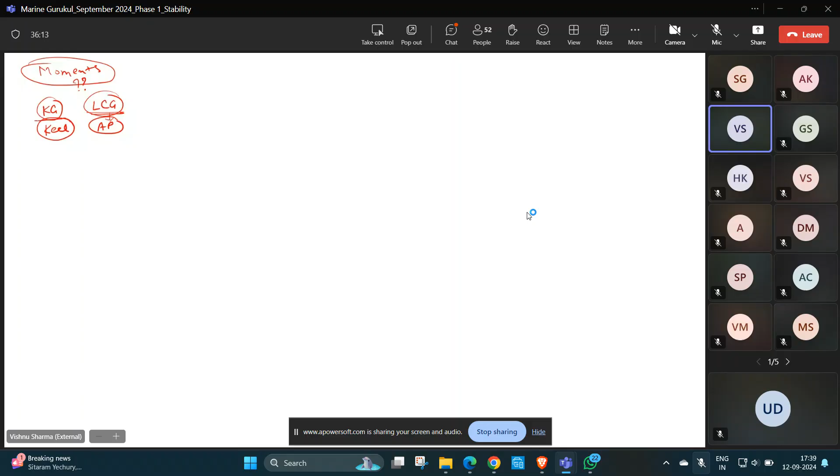So, what is important? Let us say we have a ship here. Let us say the ship comprises of only 3 weights: W1, W2, and W3. And let us say the weight of the ship's hull is negligible. That means the displacement of the ship is now nothing but W1 plus W2 plus W3.

Now, if you are talking of KG, then you are talking about the distance of the center of gravity of W1 from keel. This is called the lever of weight 1, and we can call it KG1. So what is KG1? KG1 is the lever of W1 from the keel. KG2 is the lever of weight W2 from keel. KG3 is the lever of weight 3 about keel.

Then we say, what is the vertical moment of W1? It is W1 into KG1. That means the weight multiplied by its lever. What is the vertical moment of the second weight? It is W2 into KG2. What is the vertical moment of the third weight? W3 into KG3. Is there any other weight on the ship, including the hull? None in our assumption. If we add all of them, we get the total vertical moment of the vessel about keel.

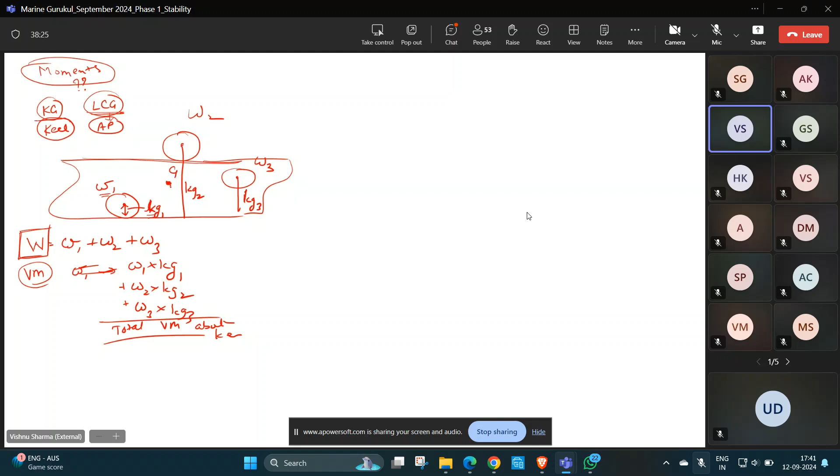And what do you do? You assume the ship as one entity and say the total weight of the ship is one body. It is distributed at W1, W2, W3, but until now I was taking each one of them as individual. Now they are all placed in one body. And now we are saying, where is the center of gravity of the body? The center of gravity of the body is G. This is the lever of the COG of the ship about keel.

So the vertical moment of the ship can be obtained by adding these three, or the vertical moment can also be obtained by multiplying W into KG. Since both these represent the vertical moment, we can equate them. And that is how you calculate KG by this formula, guys.

This is how you have been calculating KG. Some of you may have realized what you are doing, some might have just mugged it up, dividing by W1 plus W2 plus W3. I'm sure all of you are familiar with this method. Yes or no? Yes, sir.

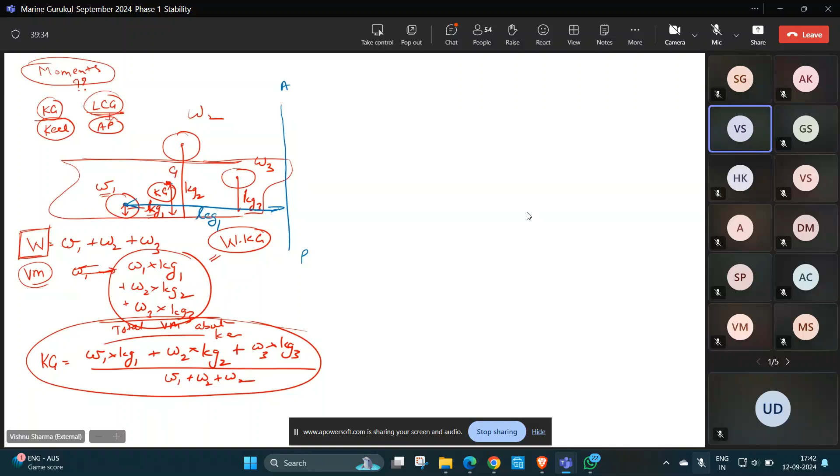Now, in the same ship, if I take the levers not about keel, but about the after perpendicular, then this becomes the lever of weight 1, LCG1. This is the lever for the second weight, LCG2. This is the lever of weight 3, LCG3.

Tell me, guys, will W1 into LCG1 plus W2 into LCG2 plus W3 into LCG3, which is the vessel's longitudinal moment, be equal to the vertical moment, or do you expect them to be unequal? Unequal, sir.

But you see, it's the same ship, same weights, in the same location. You've not shifted anything, yet the longitudinal moment value does not match the vertical moment value. Why? Because the axis about which the moments have been taken has changed.

Axis has changed. So guys, when you take moments, what is important is you have to identify moment of what. Exactly the same way, we can take the moment of area, the moment of volume, the moment of mass, the moment of weight, or moment of any physical quantity. Mass and weight we have just seen for KG and LCG. Similarly, area moments and volume moments can also be taken.

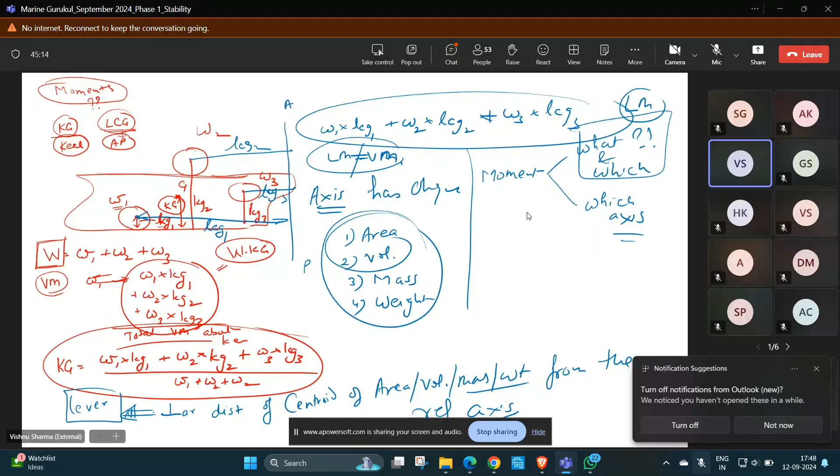And you see, when the ship comprised of three weights, we could add all the moments and get the total moment of the ship about keel or about after perpendicular. Any questions on the class? Is it clear?

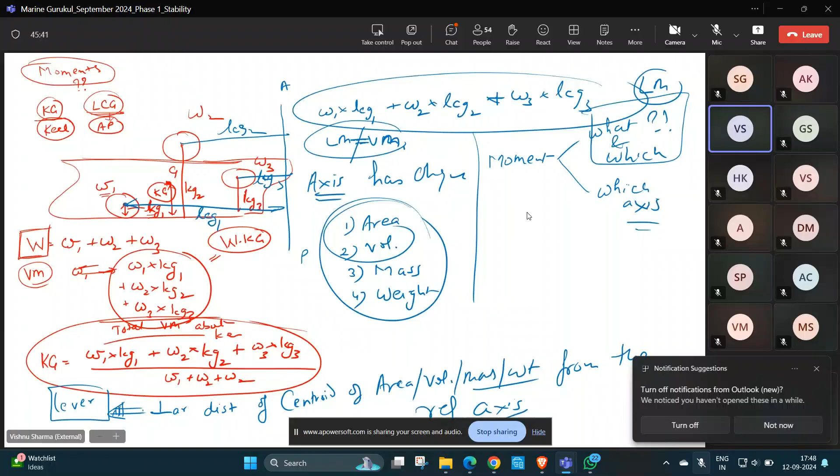Now, guys, on the same lines as the ship's KG, suppose I have an axis, let's say y or x or z, doesn't matter. Let us say I have two areas: area A1, whose geometric center is G1, and area A2, whose geometric center is G2.

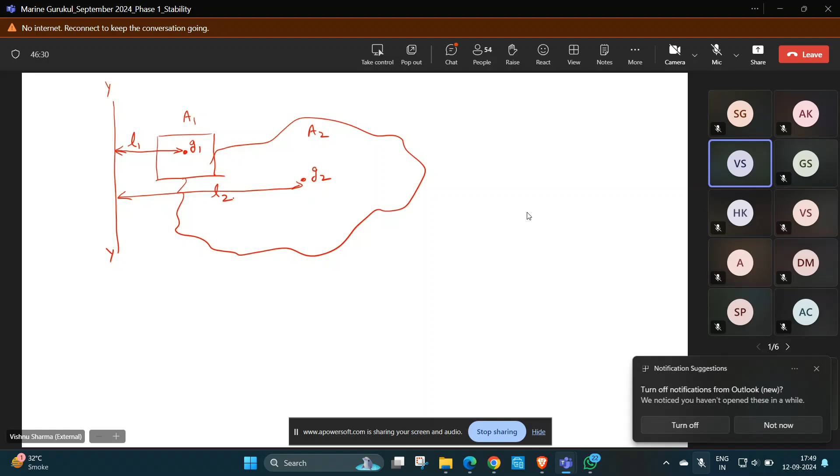Now, if reference axis is YY, then this is the lever of area 1 from YY, and this is the lever of area 2 from YY. So this represents moment of area 1 about which axis? About YY, it will be equal to A1 into L1. Does everybody agree? Yes, sir.

Clear? Exactly the same way, moment of area 2 about YY will be A2 into L2. Now if I talk of the combined area, I'll run the blue marker on the total combined area. The total area A, if blue area is A, we know A is equal to A1 plus A2.

Now what will be the moment? If I add these, I'll get moment of area 1 plus moment of area 2, and this will be A1 into L1 plus A2 into L2. Since there are only two areas, this will become the total moment of A1 plus A2 about YY.

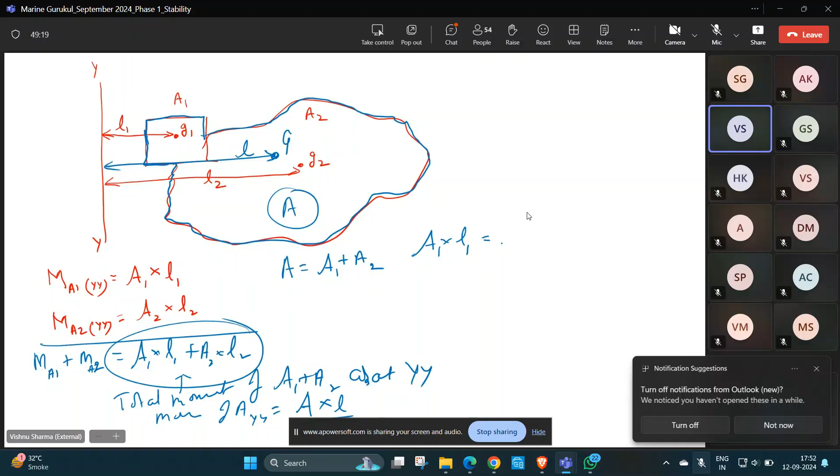Since these both represent the same moment—in one it is the total area's moment, in the other it is the sum of the moments of the components—both have to be same. So A1 into L1 plus A2 into L2 has to be equal to A into L. That means the distance of G from the axis will be equal to A1 into L1 plus A2 into L2 upon total area, which is A1 plus A2.

This is exactly what you do for KG. Remember, guys, when you find the KG of the ship, this is how you find it—instead of area, it's the weight which comes into picture. Am I right? Correct? Yes, sir. So it is the same concept.

Why am I repeatedly talking of KG and LCG? Because you've been using it day in and day out. You may know it, you may not know it, but you are using it.

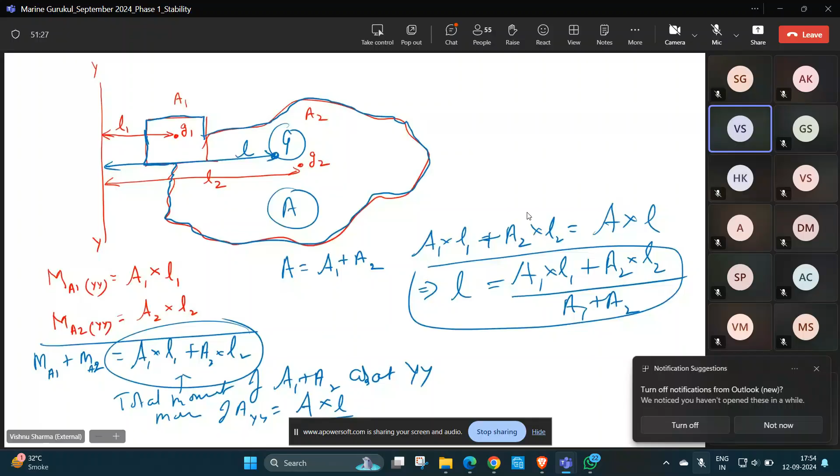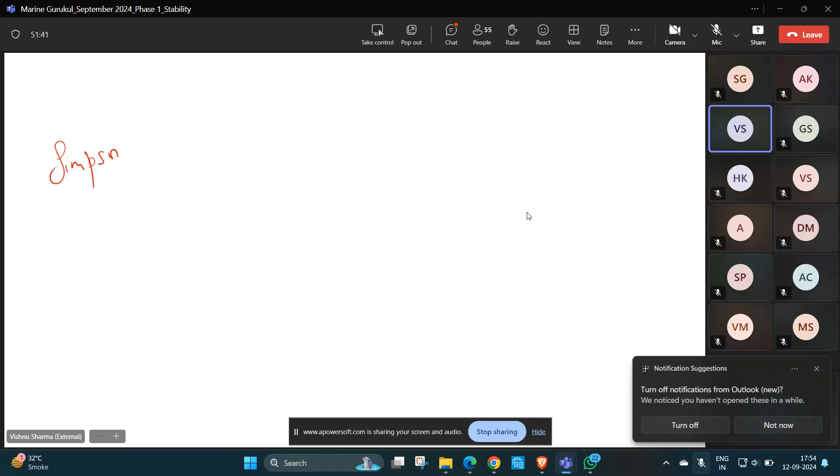Now, the last thing before we go further: what are Simpson's rules? They will come in later also. Simpson's rules is nothing but a simplified technique of integration.

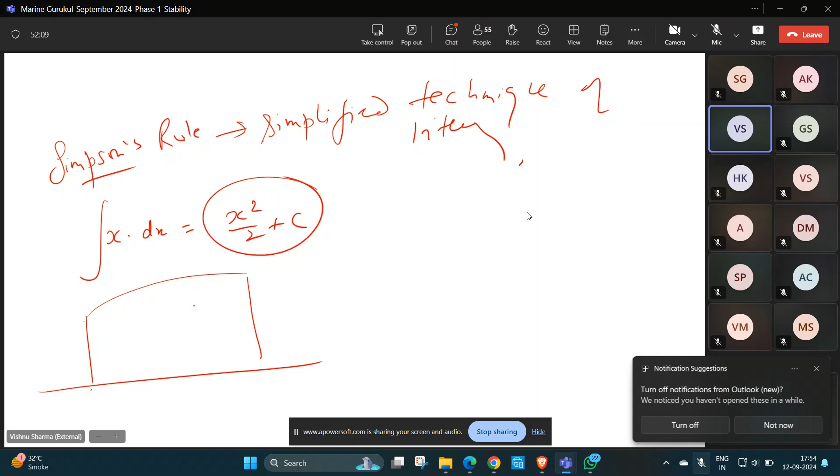Guys, in school we learned what integration of x dx means—it means x square by 2 plus constant. So for curves, if we have an area like this, we'd take an elemental strip of thickness dx, find the equation of the curve, calculate this area as rectangular, and then integrate within the limits using definite integrals. That becomes a cumbersome, tedious process.

So what did Simpson do? He simplified this technique of integration through the application of his technique. So if somebody asks you what Simpson's rules are, it's nothing but a technique of integrating. And what is integration? Integration is adding together, putting everything together. You integrate the states of India, it becomes a country. So integration is nothing but adding, putting them together. That is what integration is—it's a simplified technique of integration.

Now, are these empirical rules or derived formulae? What are empirical formulae? Empirical formulae do not have a derivation. People perform experiments, get results, and then try to make a formula in which the results can fit and be justified. They don't have a derivation backing them.

What are mathematical formulae? Mathematically derived formulae are the formulae which have a derivation backing them. Simpson's rules are mathematically derived formulae. They are derived formulae, and therefore they have a derivation.

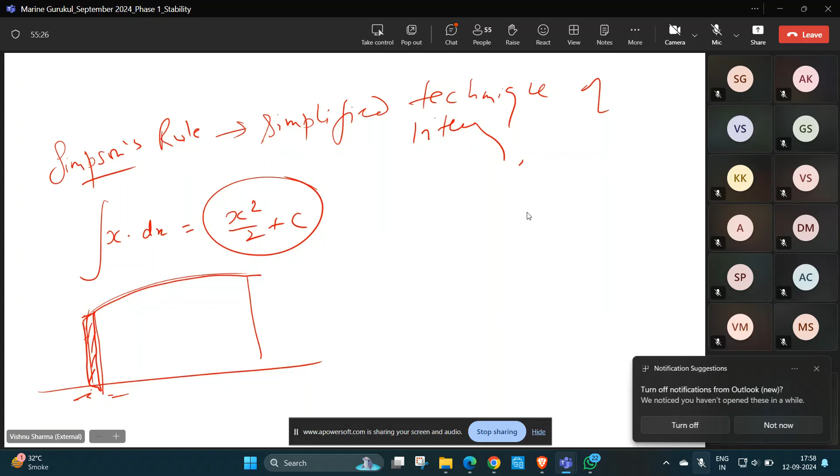Simpson's rules are a convenient and user-friendly technique of achieving integration. Results are not exact, but reasonably good for the purpose of naval architecture. So hence it is extensively used in naval architecture.

These rules are mathematically derived. We don't have the derivation as part of our curriculum, but the derivation is quite simple. At any stage of your career, if you want to educate yourself, all of you have access to Ship Stability by Derrett. If you open the chapter on Simpson's rules in Derrett, you'll find the derivation. So if at any stage you want to go through the derivation, I've told you where it can be seen.

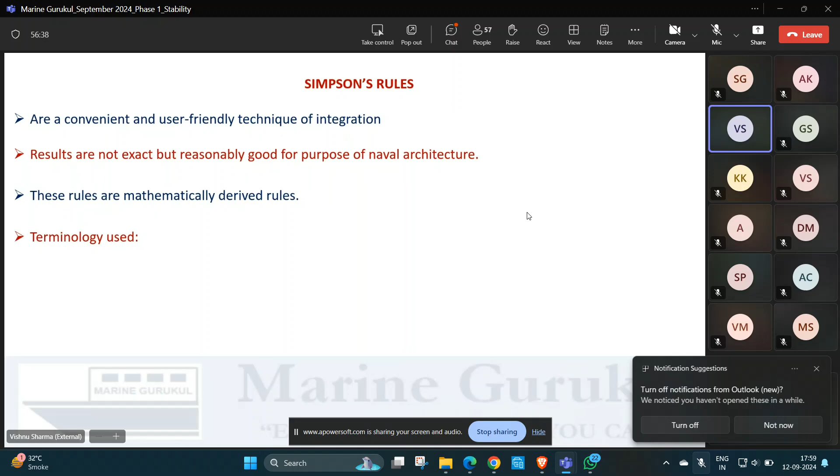Now, it is very important that we understand certain terms when we apply Simpson's rules, because we'll be repeatedly using those technical terms. The terminology has to be clearly understood. What is it that we need to know?

First will be ordinate. Second will be common interval, represented by small h. Third would be Simpson's multipliers. Fourth would be Simpson's coefficient. And last would be the result. We shall first understand these correctly.

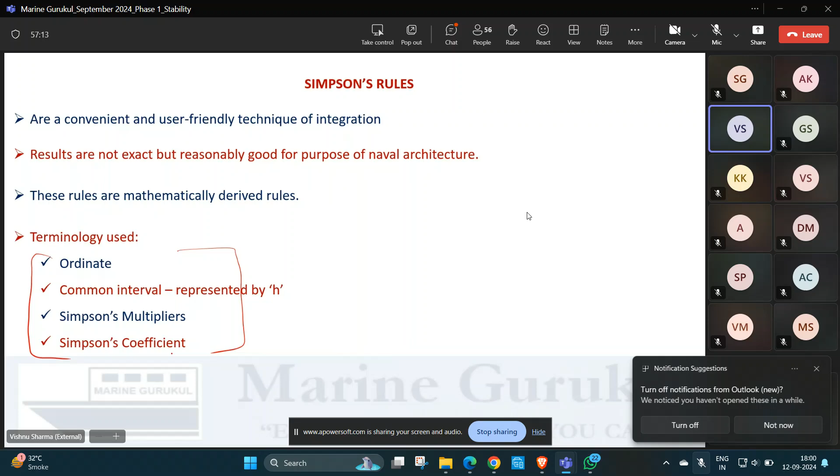What do they mean exactly? Now, what is ordinate? Ordinate is the input to the Simpson's process. If you manufacture something, there is an input and there is output. So to the Simpson's rules, what is it that you use as input, and what is the output you get?

Guys, just have your fingers in front of you, all four fingers of your hand. Just spread the four fingers apart. Now what happens? Each finger is separate. Assume that the thickness of each finger is negligible, so each finger represents a straight line. Have you done that?

Each finger represents a straight line, and you have opened them up, with each having negligible thickness, so it's just a straight line. Now, if you put all the fingers together, you have integrated them, put them together. What does it become? It becomes an area, yes or no? If you bring your fingers together, all four fingers form an area. Am I right, guys? Yes or no?

Yes, sir, correct. Suppose you take matchsticks, and imagine each matchstick has negligible thickness, so each matchstick represents a line. When you lay all these matchsticks on the table, each joined and connected to the other, each touching the next, you'll find these matchsticks occupy a certain area of the table. Am I right? They will occupy an area of the table like this: one stick, second stick, third stick, fourth stick, fifth stick, and they will be occupying a certain area.

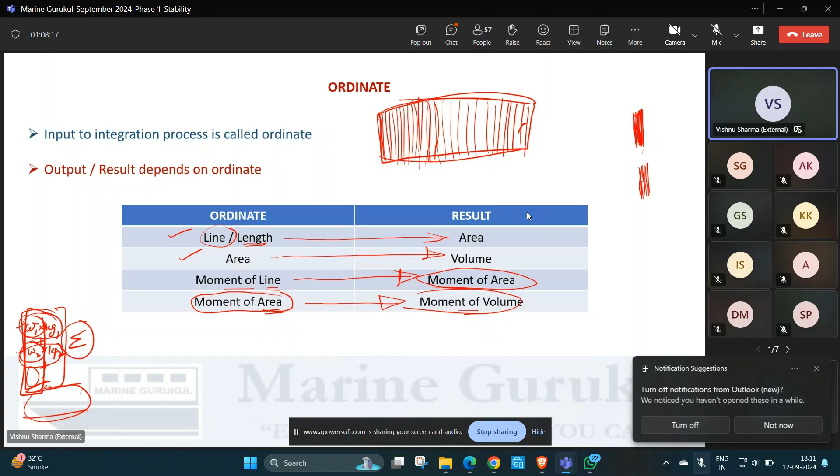So please remember, my ordinates can be the length of a line. If it's length of the line, the output would be area. My ordinate can be area, in that case the output will be volume. My ordinate can be moment of a line, then it will be moment of the area formed by those lines. And it can be moment of area, then it will be moment of the volume formed by those areas. Have you understood? Any of these could be the ordinates, and depending on what is the input to the process, the output will accordingly change.

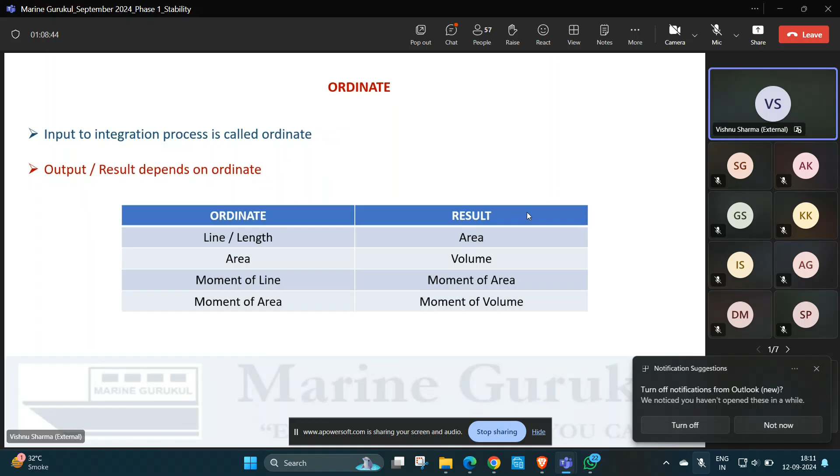Let me clear it and show it to you again. If you have any questions to ask, tell me, beta. Is that clear? Clear, class? Yes, sir. I'll continue explaining on this page only, and I'll not show the next one earlier.

So we had a couple of terms. First was the ordinate, we have already understood what an ordinate means. Second was Simpson's multiplier. Of a forecastle like this, you need it for whatever purpose. As a chief officer, what can you decide? Okay, I will measure the breadth of the ship, this forecastle, at a few select points, and then I will put it through the integration process through Simpson's rule, and I will get the area of the forecastle.

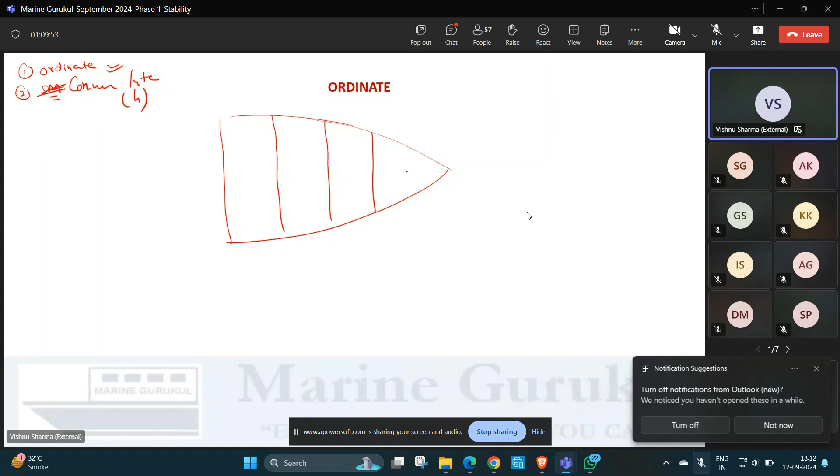Now, sorry, not Simpson's multiplier, sorry, this is common interval. The common interval is first that I'll cover, represented by small h. In Simpson's rules, it's important that when I decide to take certain ordinates, measure it at a few stations, these are the ordinates I have picked up, which I'll put through the Simpson's process to get the area. Now, what is important in Simpson's rule is that these ordinates must be equispaced.

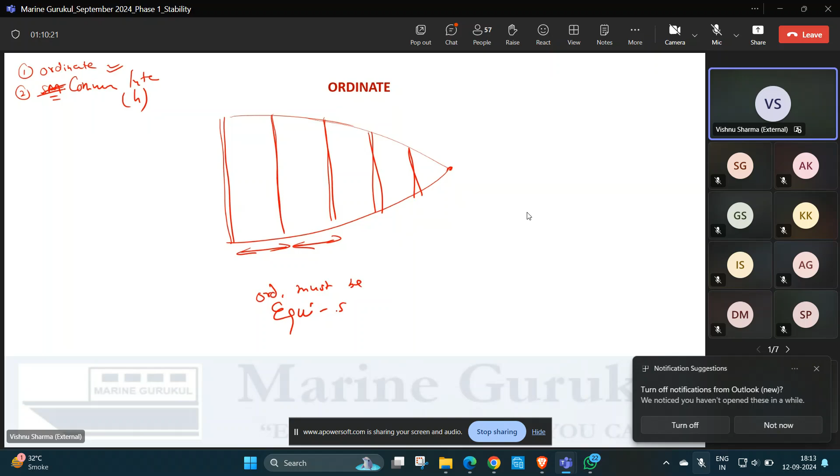So it's called common interval, represented by small h. Have you understood the meaning of common interval, guys? Yes or no? Yes, sir.

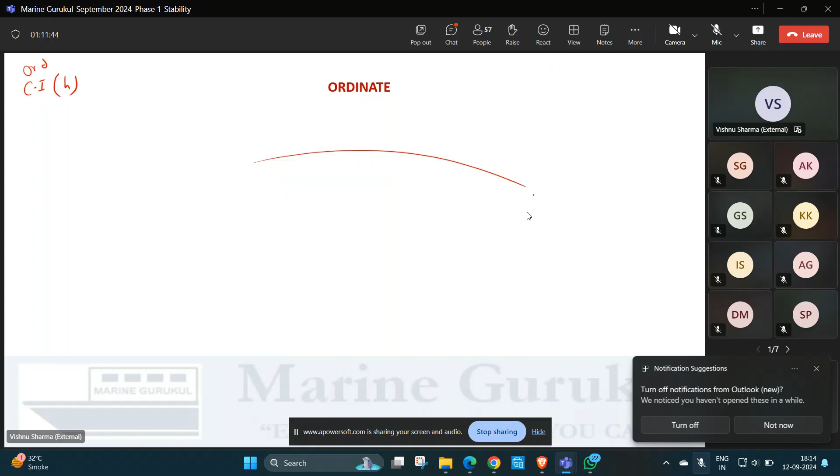So now, for example, we have done the ordinate. Now we are talking of common interval h. In this, let us say the length of the forecastle is 30 meters, and the chief officer feels he'll take only three ordinates. So one he'll take here, one he'll measure there, and the third one he'll measure midway. Why? Because the spacing has to be the same. So in this case, there are two common intervals, 1 and 2. So the value of the common interval will be 30 by 2, equal to 15 meters. Am I right, beta?

Correct? Right, guys? Understood, beta? What is common interval?

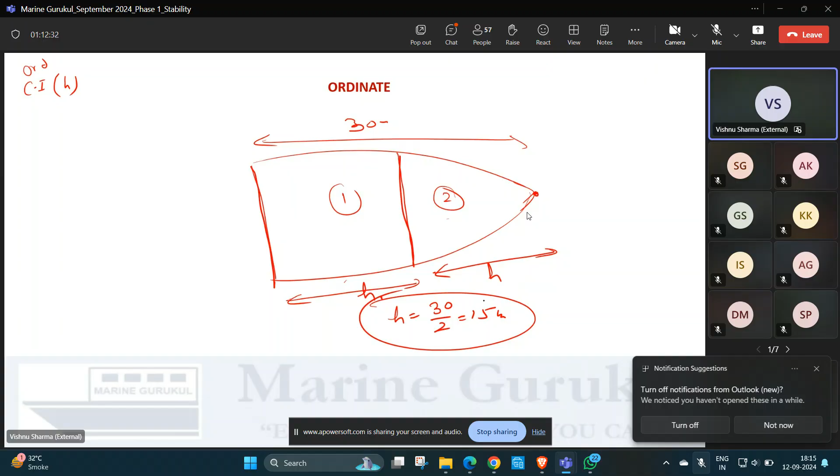Now another chief officer may feel, no, no, I'll not take 3, I want to take 5. Now how many intervals are there? 1, 2, 3, and 4. So in the blue one, the value of h will be 30 by 4, that is 7.5 meters. Have you understood? So more the number of ordinates for the same situation, lesser will be the common interval. Lesser the ordinates, more will be the common interval.

And now in Simpson's rules, we said it gives you a good approximation. So if you want to improve the accuracy, you should reduce the common interval to as low as possible. Lesser the common interval, more accurate will be the results. Higher the common interval, lesser accurate would be the result.

So same for forecastle: one chief officer does with 3 ordinates in the red one, another does with 5 ordinates in the blue one. Obviously, the result of the one who does with 5 ordinates will be better than the one who does with 3 ordinates. Is that clear, beta? So don't say why should I take 5. If you want to improve the accuracy, you will have to take more ordinates. Is that clear, beta?

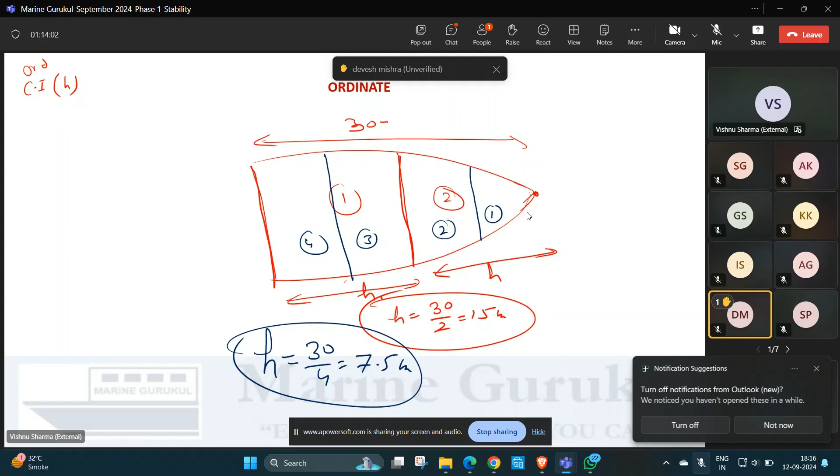So we have learned two terms. One is the ordinate and second is the common interval. Third is Simpson's multiplier.

Now, what is Simpson's multiplier? Firstly, the word Simpson's here indicates that it has come out of the derivation of the Simpson's rule. Multiplier means this number has to be multiplied with something. So these are fixed numbers, constant numbers. Where do they come from? They come from the derivation of the respective Simpson's rules. What do we do with these numbers? These numbers are multiplied with the ordinates. And since they are multiplied with the ordinates, they are called multipliers.

So just to cut it short, what are Simpson's multipliers? Simpson's multipliers are fixed numbers whose value depends on the rule being used. So there will be a different set of multipliers for rule 1, a different set for rule 2, and a different set for rule 3. These are fixed numbers based on the rule being used, and these numbers are allocated to the ordinates. Since they are multiplied with the ordinate, they are called Simpson's multipliers.

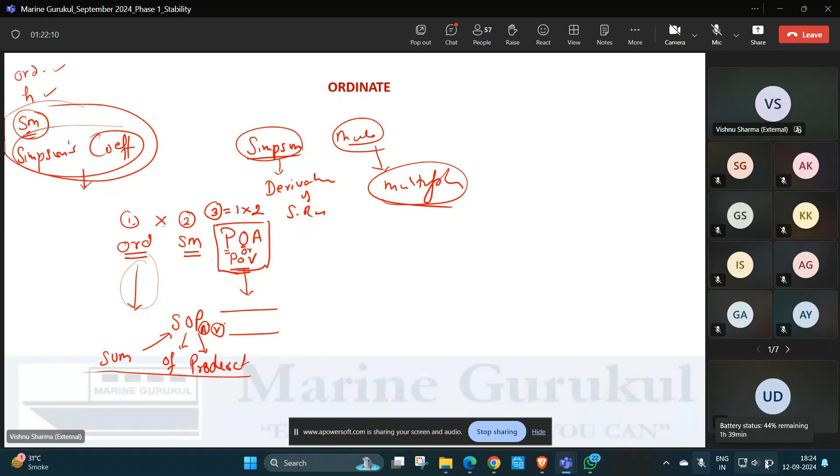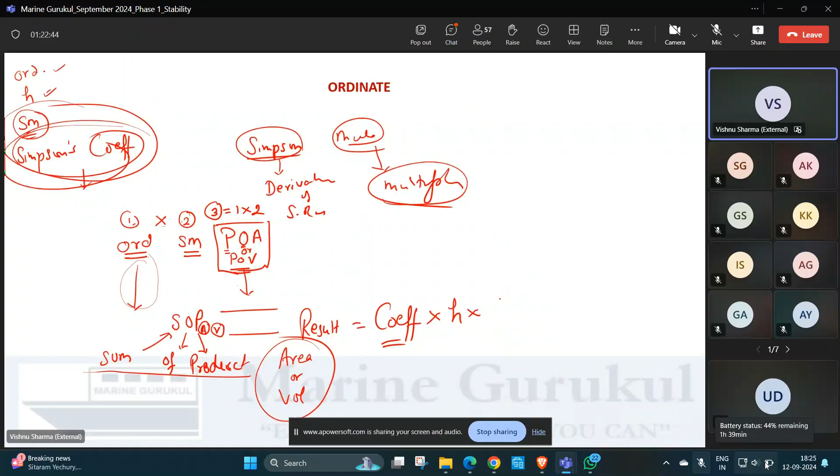Okay. Once you get SOP, the last step gives you the result. What will be the result? It will be area or volume depending on what the ordinate was, or I prefer to call it the result. The result will be equal to Simpson's coefficient, this one, multiplied by common interval h, multiplied by the SOP that you got here, and you will get your output.

You will get your result by multiplying the coefficient into common interval into sum of products. If you were dealing with SOP area, you will get area. If you're dealing with SOP volume, you'll get volume. So output will depend upon what the input was. This is the process flow for the Simpson's rules. Understood, beta? Yes, sir.

Guys, if you have any questions, let me know. I know after one or two questions it will become mechanical, but having an overview will always be helpful. Okay. Now I'll take you through a simple question.

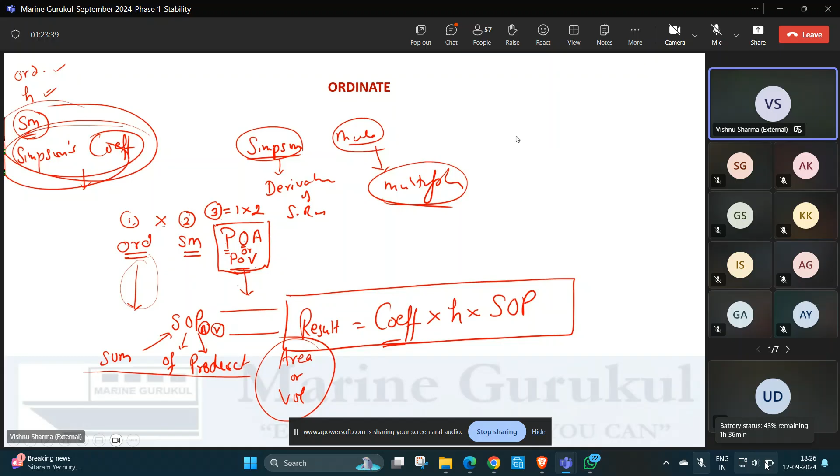As I told you in the beginning, the basis of derivation of all three rules is different. And because the basis is different, all cannot be applied in every situation. By situation, I mean number of ordinates. So based on the starting point of the derivation, there is a certain applicability criteria.

And now I will talk about rule 1 only for some time. Then we'll go do some questions about rule 1. Settle down with the process. Then we'll just learn the changes to be made for rule 2, because the process will remain same. Rule 3 we'll put on hold for a while, because somewhere it is common to the two, somewhere it is different. So that will be dealt with later on once we are all done with rule 1 and 2.

There is one mic which is echoing. Better.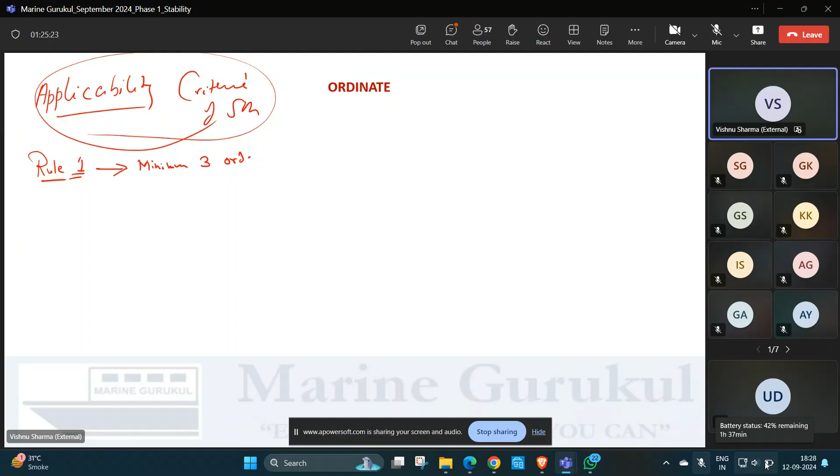Applicability criteria. So every rule cannot be applied in every scenario. Please remember that. So now we are talking of rule 1. When can rule 1 be applied? Rule 1 can be applied when you have minimum 3 ordinates. Minimum 3. What happens after that? We'll add to that in a way. Let's take an example of the forecastle and calculate.

Let us say this is the forecastle. The ordinate here is 0. Let's say it is 20. And midway between the two, if you measure, let's say it is 12 or 13, whatever it is. These are the ordinates: 0, 12, 20. And let us say the length of the forecastle is 30 meters. So h will be 15 meters. Now, since there are 3 ordinates, rule 1 is definitely applicable, because for rule 1 to be applicable, minimum ordinates required is 3.

Now, if 3 ordinates are there, then there have to be 3 multipliers. So Simpson's multipliers for rule 1 for 3 ordinates is 1, 4, 1. Every time you use rule 1 and you have only 3 ordinates, the multipliers will remain 1, 4, 1. Now this sequence is very important. Don't make it 1, 1, 4. Don't make it 4, 1, 1. It will mess it up otherwise. So please respect the sequence order.

It's 1, 4, 1. Now what is the coefficient for rule 1? Coefficient for rule 1 is 1 by 3. So every time rule 1 is used, coefficient will be 1 by 3 only. And every time rule 1 is used and you have 3 ordinates, multipliers will be 1, 4, 1. Now guys, when it comes to calculating area, we'll first put ordinates. It is up to you whether you want to start with 20 or you want to start with 0.

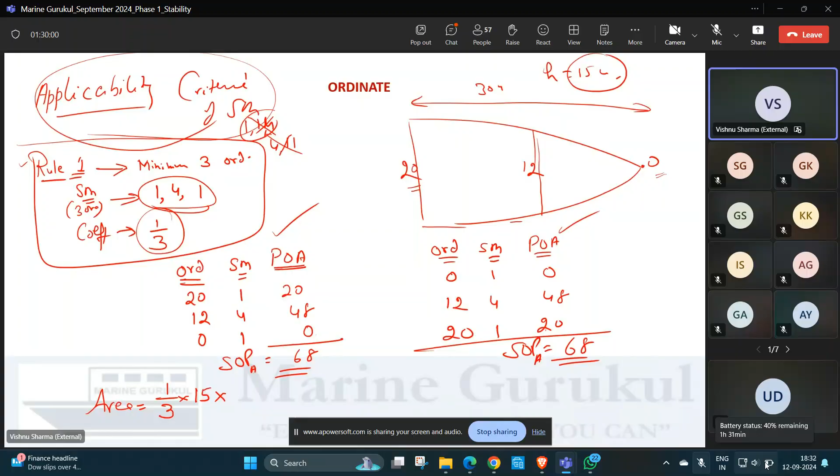Now, the area of this forecastle will be equal to coefficient 1 by 3 for rule 1, times common interval 15 meters, times SOP area 68. 340 square meters will be the area of the forecastle by rule 1, 3 ordinates.

Now units will depend on the unit of the ordinate. If ordinate is in centimeters, area will be centimeter square. If ordinate is in meters, area will be meter square. If ordinate was feet, it will be feet square. So the output unit will depend on the unit of the input. Is the process clear? Am I clear about the unit issue also, beta? Yes, sir. Guys, any questions? Okay.

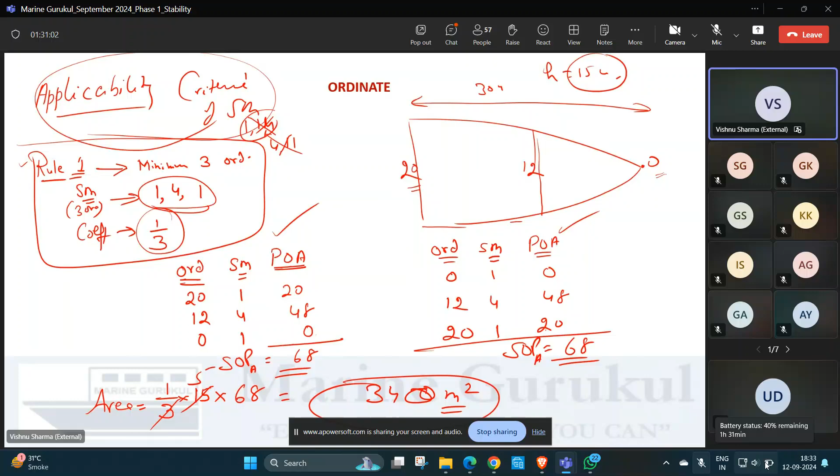Somebody says, no, I don't want to do with 3, I want to do with 5. Let me do it with 5. So 12, 20, let me remember that, and answer 340. Let me clear the board, and the same thing let's do with 5 ordinates.

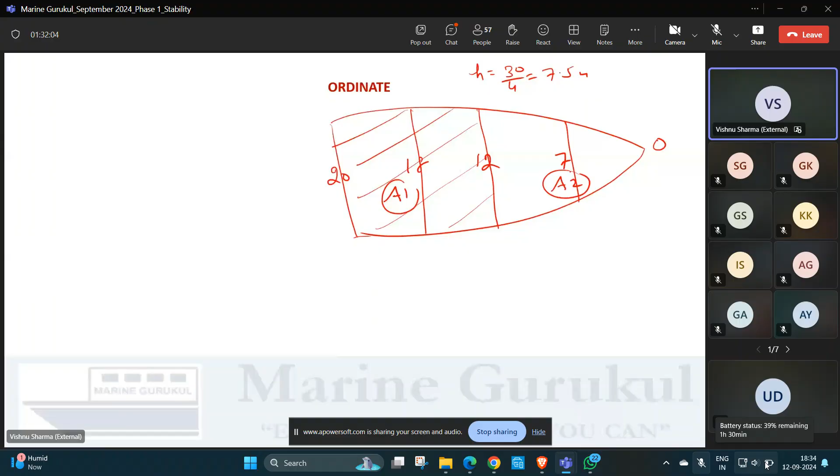Now you see, guys, in this case, this area can be considered to be divided into two parts, A1 and A2. Correct, beta? Yes or no? Correct, class? Yes, sir. Now, A1 comprises of 3 ordinates. Now I'll not use the values, I'll number the ordinates. Let's use a generic value, Y1, Y2, Y3, Y4, and Y5.

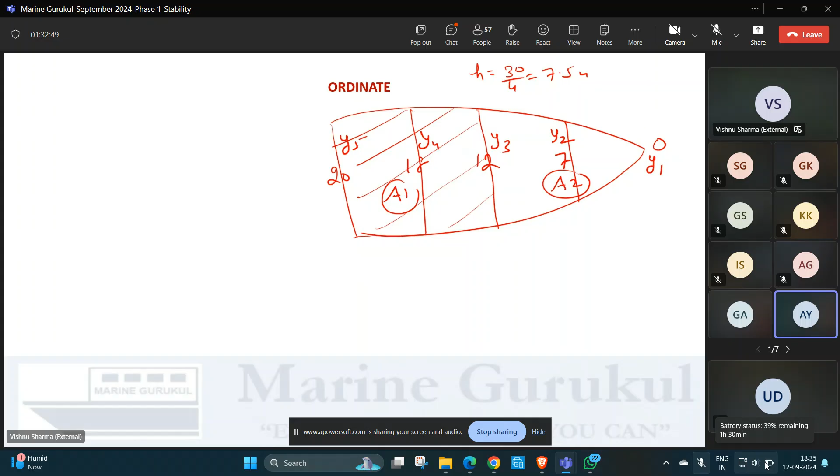Okay. Now, both the areas A1 and A2 can be separately calculated using rule 1 that we have learned until now. Can area 1 be calculated by 3 ordinates? Yes or no? Am I right, guys? Yes, sir. Possible. And so is area 2. So let's call this as area 2, area 1, doesn't matter whichever. Now the table for A1 will be ordinates y1, y2, y3. Simpson's multiplier 1, 4, 1.

Product of area 1 will be y1 into 1. I'm underlining the Simpson's multipliers, guys. y2 into 4, y3 into 1. And this will give me SOP A1. It will be y1 into 1 plus y2 into 4 plus y3 into 1. Does everybody agree with the calculation of A1? Yes or no? Yes, sir.

And now, what will be area 1 equal to? This common interval is h, so it is coefficient 1 by 3, common interval h into SOP A1, y1 into 1 plus y2 into 4 plus y3 into 1. And this will give me area A1. Do you agree with me, guys? This gives me area 1, yes or no? Yes, sir.

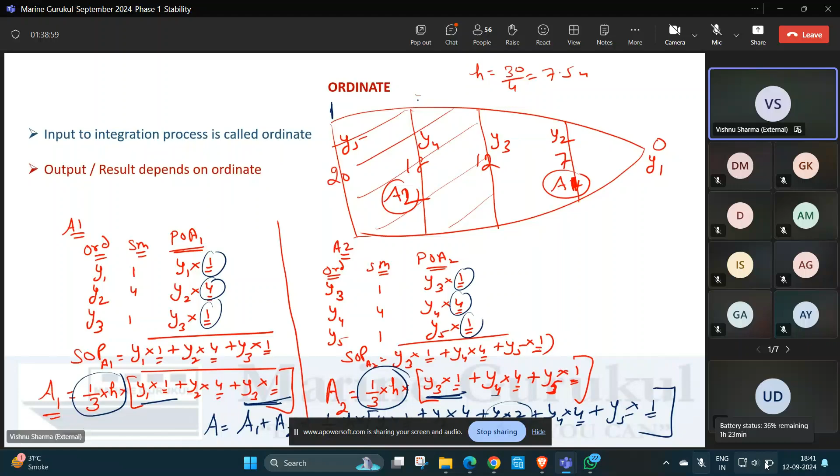Let me assign the multipliers on the diagram. We have 1, 1, 4, 1 from here. You see y3 was given 1, y4 was given 4, y5 was given 1. And then y1 was given 1, so 1, 4, 1. So what has happened if you look at this diagram? The dividing ordinate y3 got one multiplier for area 2 and it got one multiplier for area 1.

Therefore, effectively if I want to do it in one go rather than making two different tables, I can take the multipliers as 1, 4, 1 plus 1, 4, 1. So either I make two tables or I make them in one table by changing my ordinates' multipliers. So look at what has been underlined: it's 1, 4, 2, 4, 1. So instead of saying 1, 4, 1 for 3, it is 1, 4, 2, 4, 1 for 5.

But if I have 5 ordinates, instead of making two tables, I can make it 1, 4, 2, 4, 1, and I will be able to do it in one table. Yes or no, beta? Am I right? Yes, sir, yes, sir. So instead of wasting time and effort, we can do it in one go.

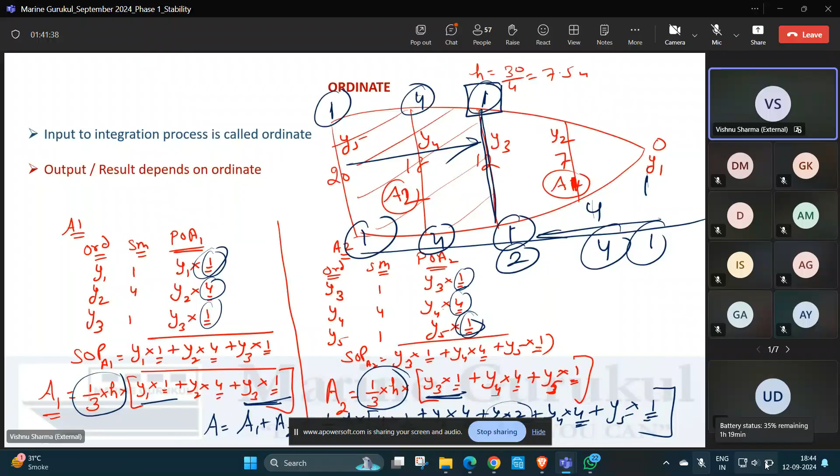Exactly the same way you can add another 2, another 2, another 2, and every time you'll find rule 1 becomes applicable because you can divide the area into sections of 3 each, and you will be able to do it section wise, add them, or you can do it collectively. So what do we infer? The applicability criteria for rule 1 is minimum ordinates you should have 3, and if the number of ordinates is minimum, then Simpson's multiplier will be 1, 4, 1.

If the number of ordinates is more, then you'll count the total number of ordinates. And if the number of ordinates is odd, you can still use rule 1. Then how many multipliers will you have? It depends on the number of ordinates. If you have 7 ordinates, you'll have 7 multipliers. If you have 13 ordinates, you'll have 13 multipliers.

So how do you assign the multipliers? They will follow the same pattern: you start with 1, then 4, and 1 goes in the end. In between, from 3 to 5, how many are you adding? 2. So you keep repeating 4, 2, 4, 2 as many times as required, ending with 4, 1, till the number of multipliers equals the number of ordinates.

So please repeat to yourself a few times: for rule 1, applicability criteria first. For rule 1, applicability criteria is minimum number of ordinates 3, in which case the multiplier is 1, 4, 1. For more than 3, rule 1 can be deployed if the total number of ordinates is odd. So rule 1 can be applied if number of ordinates is more than 3, also provided the total count is odd, not even.

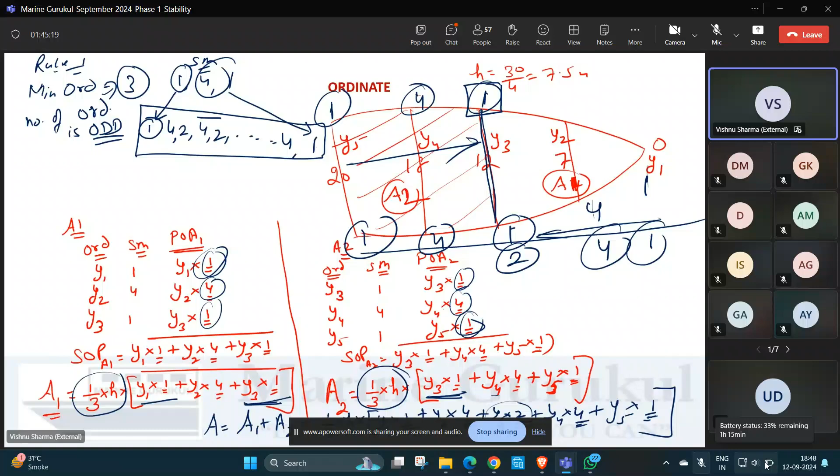Now, before we go to the question, there is one last issue which needs to be tackled, and then we'll be good to take the question from the exercise.

We have dealt with the ordinate being area, or instead of area line, or instead of line area - it would have been the same. Let's go back to the same forecastle. Suppose the chief officer wants to know what is the distance of the geometric center of this forecastle's area from this axis.

Guys, when you have to find the KG of the ship, that means the distance of the center of gravity of the ship from keel, what do you do? You find the moments about keel and divide by the displacement of the ship. Yes or no, beta? You find the vertical moment and divide by displacement. Am I right? Correct, guys?

Yes, sir. When you have to find the LCG of the ship, what do you do? You find the longitudinal moment divided by displacement. So you find the moment about the axis from which the distance of the centroid is required.

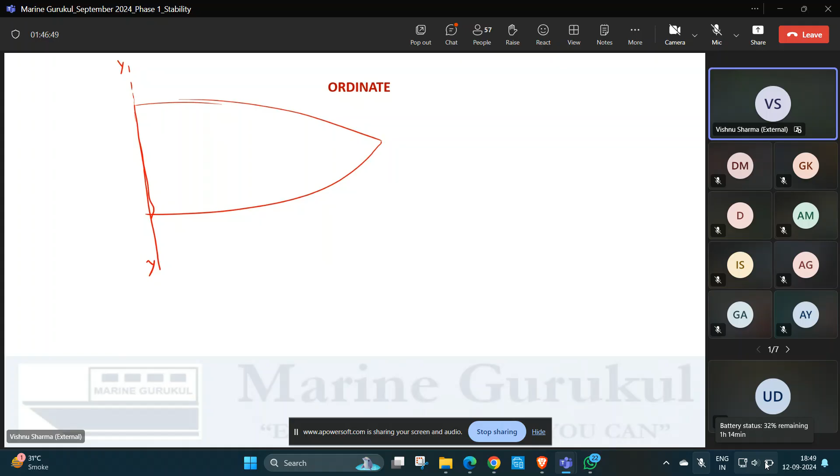So here, if I need the centroid of this area from YY, what will I do? I will need the moment of this full area about YY. Am I right, beta? Like to get KG, you need the moment about keel, and then you divide by the weight.

So here, since I want the distance of the geometric center from YY, I will need the moment of this area about YY. Let us say the mate has taken three ordinates: Y1, Y2, and Y3. This is Y3.

Okay, area you can calculate, that's not an issue, we've just discussed it. So the area would be equal to - for area calculations, let's say Y1, Y2, Y3, Simpson's multiplier 1, 4, 1. Product of area: Y1 into 1, Y2 into 4, Y3 into 1. We get sum of products for area and we close out the question.

Okay. Now guys, to get the moment, remember the ordinates input. If I want the moment of area, what should be my input, beta? Do you remember that slide? If I want the moment of the area, what should be my input? Ordinate? Moment of line, moment of the length, line. Okay, very good. Tell me, look at this.

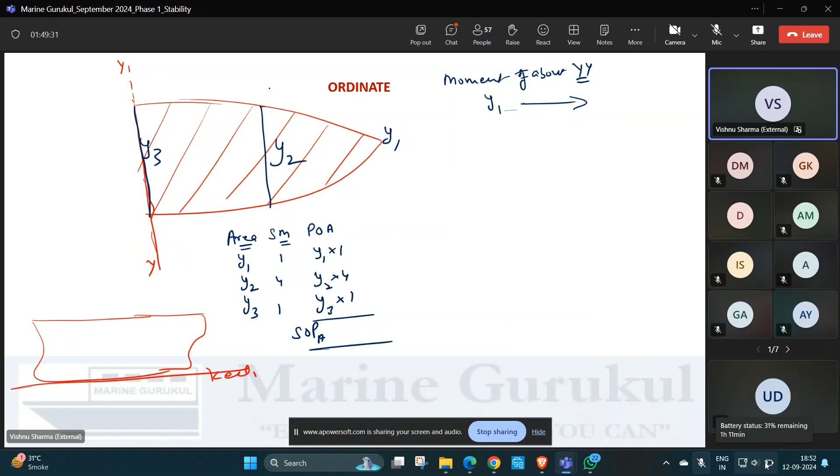So now tell me, into H into 2, 2H - that will be the lever. 2H will be the lever. What will be the moment of Y1? Tell me the moment. Y1 into 1 into 2H. Y1 into 2H. Correct? Correct, beta?

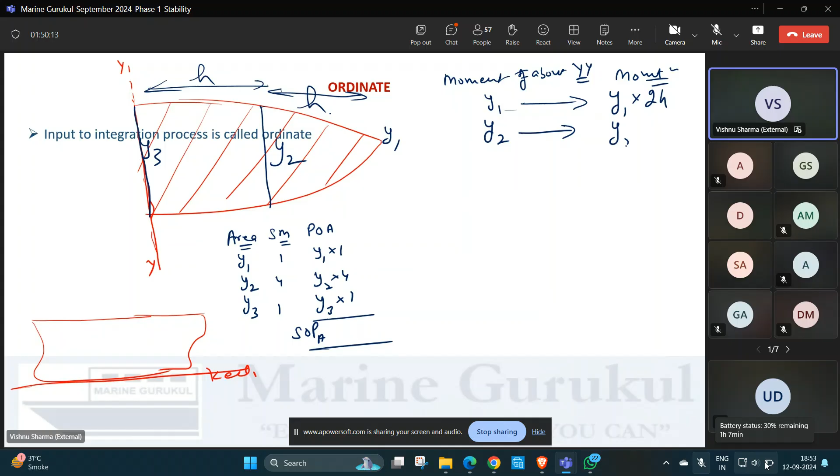Am I right? Yes, sir. What will be the moment of Y2 about YY? Look at the diagram and tell me. Y2 into H. Y2 into 1H, okay let me write 1H.

Correct. What will be the moment of Y3 about YY? Y3 into 0H. Correct, 0H. Guys, now these are the moments.

If I integrate the moments of the ordinates, what will I get? First answer that question: if I integrate these moments of the ordinates, what result will I get? Moment of area, sir. Correct?

So guys, if you see here now, my ordinates for Simpson's rule become these: Y1 into 2H, Y2 into 1H, Y3 into 0H. What am I doing? I'm integrating them using Simpson's rule now again. And since there are three ordinates, now they become the ordinates - the moment of the ordinates have become the ordinates now.

And now the Simpson's multiplier will be 1, 4, 1. When I multiply these two, the product will not give me area or volume - they will take me towards the moment of the full area. So this will be called the product of moment, right?

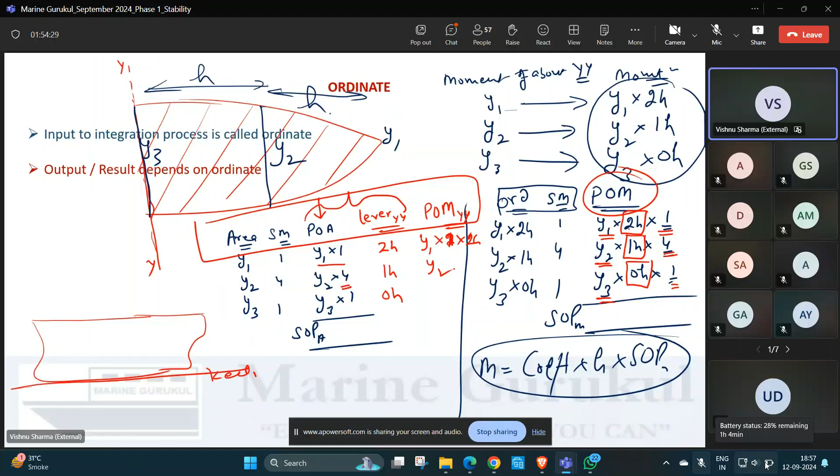So we will not make a separate table like this. We will just proceed by extending this table. Is that clear? Clear, class? Yes sir.

Okay guys, now we'll be doing 20 odd questions in the class. So don't try to unnecessarily bother yourself beyond a point. You will all be comfortable in another 2-3 days when the exercise gets over, and we'll all be comfortable with that. I'll take you to the first question that we'll discuss.

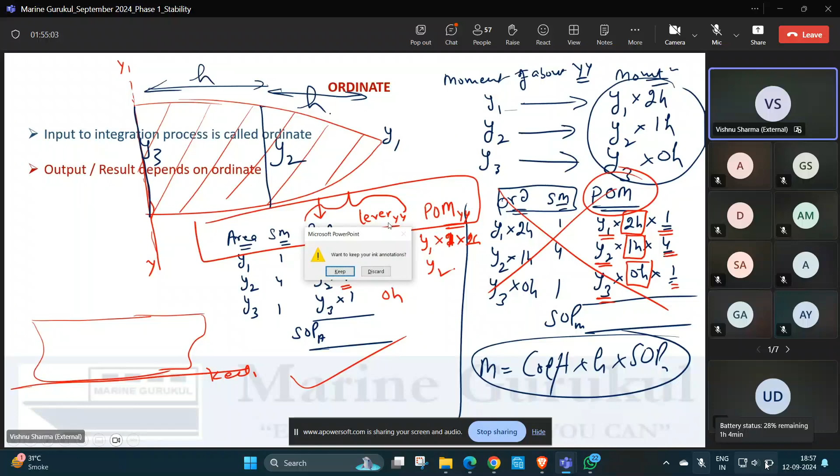I've shared the questions with you. First I'll take the second question of the exercise, because for the first question, rule 1 is not applicable. So this is the structure of the table we'll be following. This is the structure of the table. We'll have the ordinates, we'll have Simpson's multipliers, we'll have either product of area or product of volume, we'll have

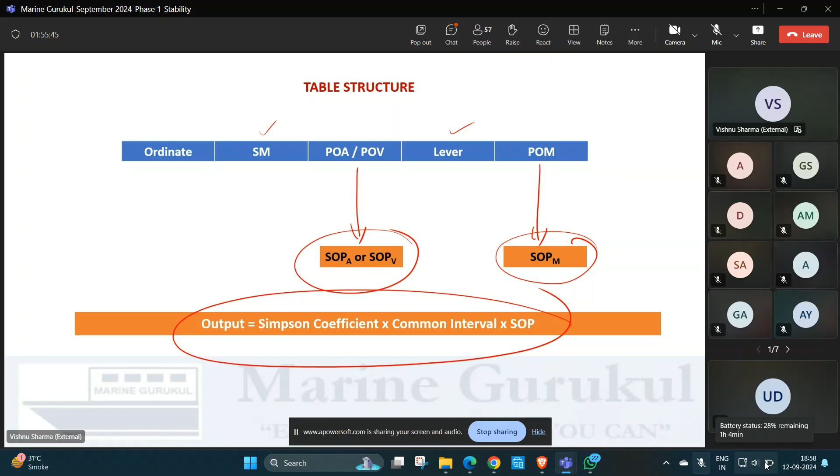lever and product of moment. We'll sum it up. This will be the sum of product of area or sum of product of volume, and this will be sum of product of moment. And we'll finally use this formula to get the answer. Is that clear? Yes sir.

Simpson's rules by itself is very simple. It's like a drill day's work. You'll get it in no time and you'll be comfortable. You are likely to mess it up primarily because of your carelessness.

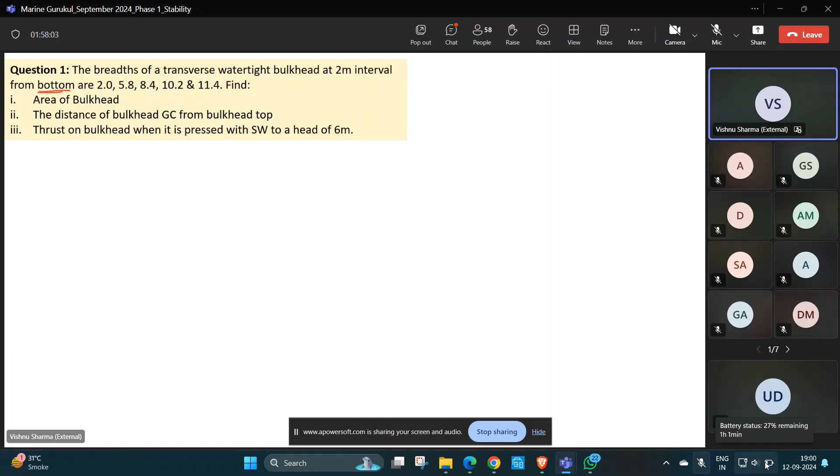I'll make a diagram for the initial 1 or 2 questions, then I'll give you the charge. I'll start following you, and you will take the lead. For example, in this case, the diagram I'll make is like this.

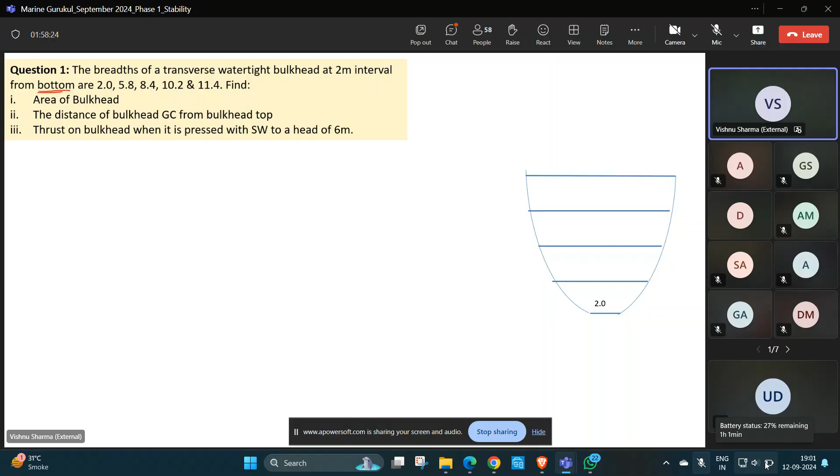This is the transverse watertight bulkhead. They have given us 5 ordinates at equispaced intervals, so these are the 5 places where the breadths are measured. Ordinates given are from bottom to top: the lowest one is 2 meters, then 5.8, 8.4, 10.2, and 11.4.

Do you agree with this diagram, guys? Yes or no? If you have any problem with the diagram, you'll have a problem with the question, please trust me on that. So if you have any issue, let me know. You have to make the diagram carefully.

There are 5 ordinates from bottom to top, and we have marked them so we are trying to transfer the relevant information to the diagram. H is 2 meters. We have to calculate this area, and we said it will be by rule 1, which will give us the answer to part 1.

Read part 2, guys. Part 2 is asking for the distance of the GC of the bulkhead from the bulkhead top. If I tell you to find the KG of the ship, you can't get it till you get the vertical moments. If I tell you to calculate the LCG of the ship, you can't unless you calculate the longitudinal moment. So here he is asking you to calculate the distance of the geometric center of the bulkhead from the bulkhead top.

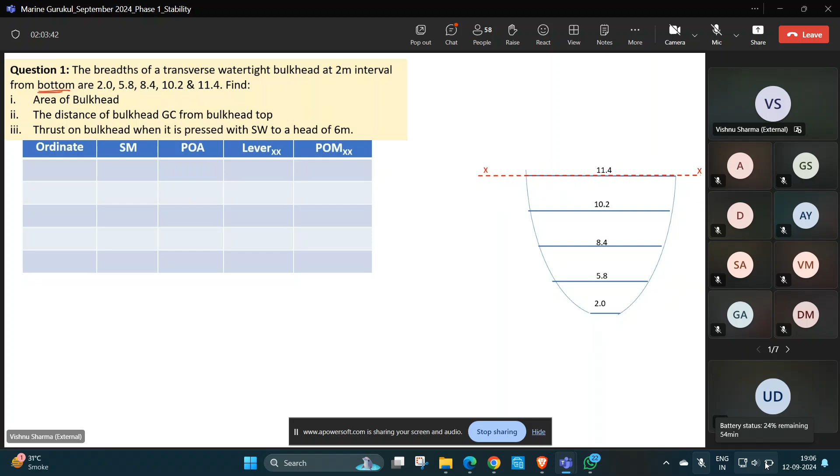Are they all clear? Tell me now. All clear? Yes, sir. They've been written like this?

Now I'll write the ordinates starting with 11.4, 10.2, 8.4, 5.8, 2 meters. Obviously, once you start, you can't jumble up the order.

Guys, in your mind, please think of the multipliers. These are 5 ordinates: 1, 4, 2, 4, 2, as many times as you need, end with 4, 1. So it will be 1, 4, 2, 4, 1. Correct?

Then we will multiply the ordinate with the respective multiplier and we'll get the product of area. But before you pick up the calculator,

write the lever. Now guys, in Simpson's rule, whether I want to write the lever as a multiple of h or use the whole number, it's your choice. We will be driven by our convenience. It is not necessary that you write 0h, 1h, 2h, nor is it necessary you write 0, 2, 4, 6, 8. You can write whatever gives you comfort.

What is our objective? Our objective is that my calculation, my process should be simplified. So however we want to use the levers, it should be the way that simplifies things for you. If you don't want to use a simplified route and go on a complicated one, that's okay, that's fair. You're only increasing your workload.

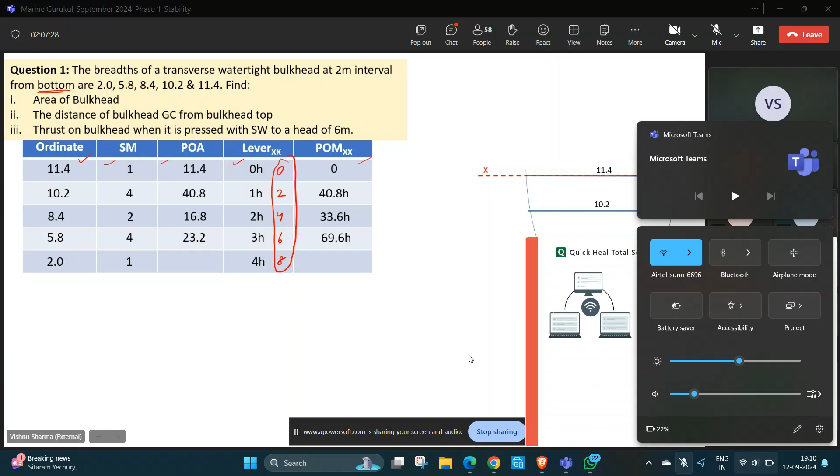Please confirm if you are okay with the table that I have filled up. Clear, beta?

So if you have h in the lever, it will be there in the product of moment also. It should not happen that you forget carrying over h there. When you're multiplying, h has to be there.

Now, which columns will you add? You'll add the product columns. There are two product columns, POA and POM. One will be called SOP area, the other will be called SOP moment about which axis? About XX.

And this comes: those who have used 0, 2, 4, 6, 8 will get 304 and will not have h in the SOP moment. Those who are using h will get 152h. Am I clear up to this point, guys? Yes, sir.

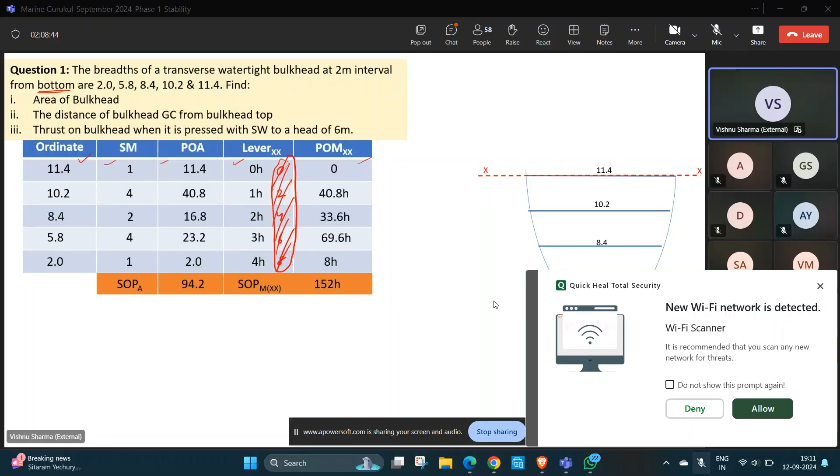Now we are good to calculate area and answer part A. Area will be equal to coefficient multiplied by common interval multiplied by SOP area, which is 94.2. Coefficient will be 1 by 3 for rule 1. And when we put these values, we get area as 62.8 square meters.

Yes or no, beta? Yes, sir, yes, sir. Okay. Why meter square? Because these are in meters.

Then we want the distance of the GC from XX. It will come because we have taken levers about it. I call it as DXX.

Guys, do you agree with this? What has come up on the screen now? DXX will be moment of the area about XX divided by area. Yes or no? Am I right? Yes. For KG, you take the moment about keel divided by the weight. Yes or no? For LCG, you take the moment about after perpendicular and divide by the weight. Yes or no, beta? Yes, sir. So it will be moment of the area about XX divided by area.

How do I get the moment? We already have product of moment about XX. We put it through the last step of Simpson's rules. What is the last step? Result is equal to coefficient into common interval into SOP moment. You see here. Do you agree with this? 1 by 3 the coefficient, 2 the common interval, SOP moment 152 into 2. 2 is for this H, divided by area.

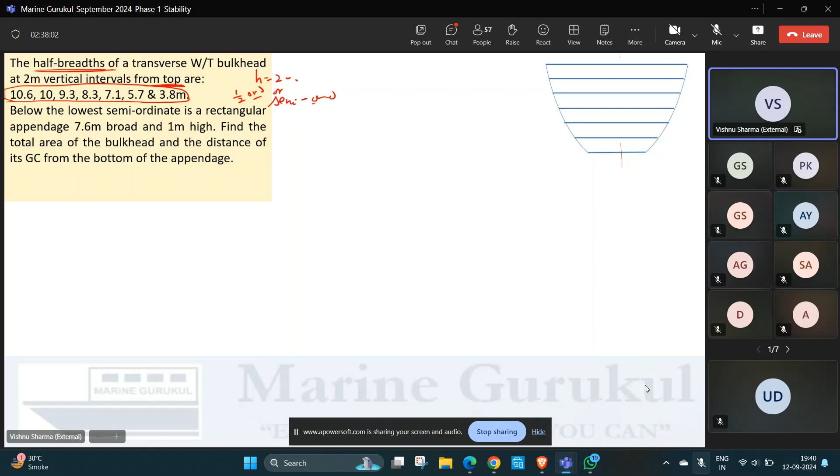Guys, this is the curvilinear part of the bulkhead. 7 ordinates. I have made them full. He's given you half of it; the other half is a mirror image. They are given from top. So the top full breadth will be 21.2 meters. Next one will be 20 meters. I'm doubling them up. 18.6, 16.6, 14.2, 11.4, and 7.6.

Is this part of the bulkhead clear to everybody, beta? Any questions on this? Please let me know, because we should not go back and forth. Is this okay up to this place? Yes, sir. Now, below the lowest ordinate, it's no more semi-ordinates. I've already made them full, so I don't care whether they were given half or not.

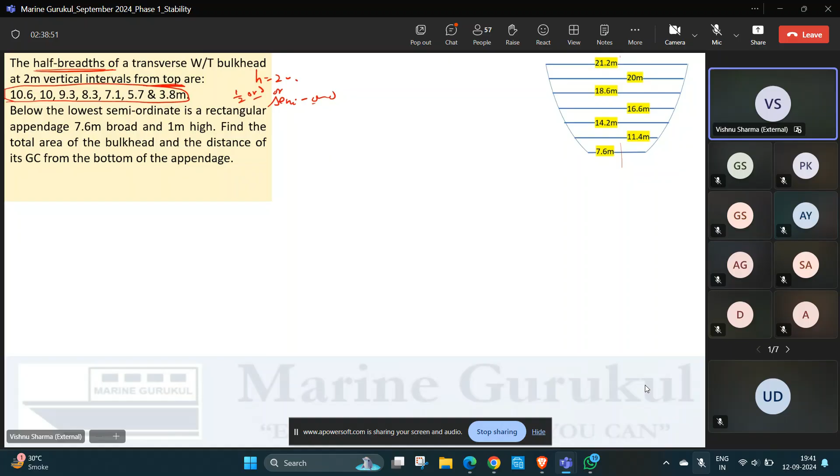Is a rectangular appendage. So this is the rectangular appendage below it, which is 7.6 meters wide and 1 meter high. This is the full bulkhead, guys. This full thing from here to here is the bulkhead. Understood? Is that clear?

Yes, sir. Is it clear, beta? Yes, sir. Guys, any questions on the diagram? Please let me know if anybody requires any clarity on the diagram.

Now, this area has two distinct parts. One part has a curvilinear shape; it's formed by the curves. And one part is a regular geometric shape. Obviously, we'll have to calculate both the areas separately and add them. So let us say we call this area 1 and this area 2.

Now, can we calculate area 1 by Simpson's rules? Yes or no, guys? Yes, sir. Can we calculate area 2 by the simple mensuration formula of a rectangle? Yes or no? Correct? And if I add both these areas, will I get the area of the full bulkhead? That will be my one answer. Yes or no, beta? Am I right? Right, sir.

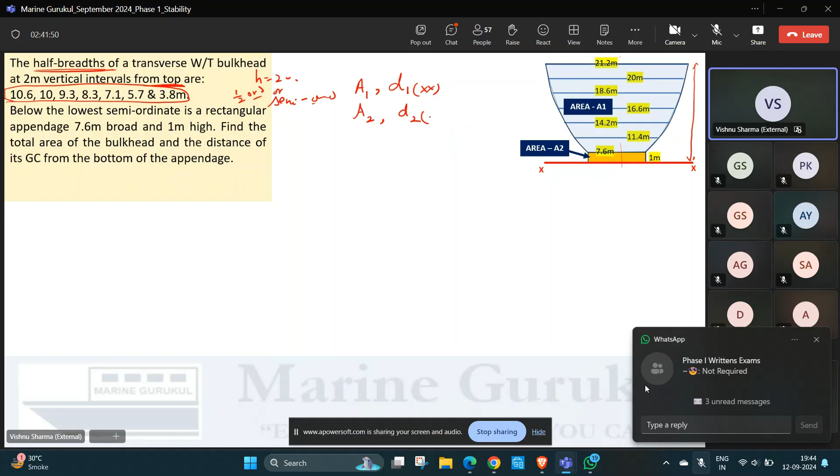Now, once I have these four things with me, guys, I'm sure all of you would agree: total area will be A1 plus A2. Am I right? Yes or no? Correct, class? Yes, sir. And for the distance of the geometric center of the combined area, a little while back in the class I had done this sort of a thing, with area one and area two. Do you remember A1 and A2? Yes or no?

Yes, sir. How did I calculate the distance of the GC of the full area from YY? How did we calculate it? A1 into its lever plus A2 into its lever, divided by A1 plus A2. Yes or no, beta? You remember this discussion? Yes, sir. If you don't remember, let me know what the issue is.

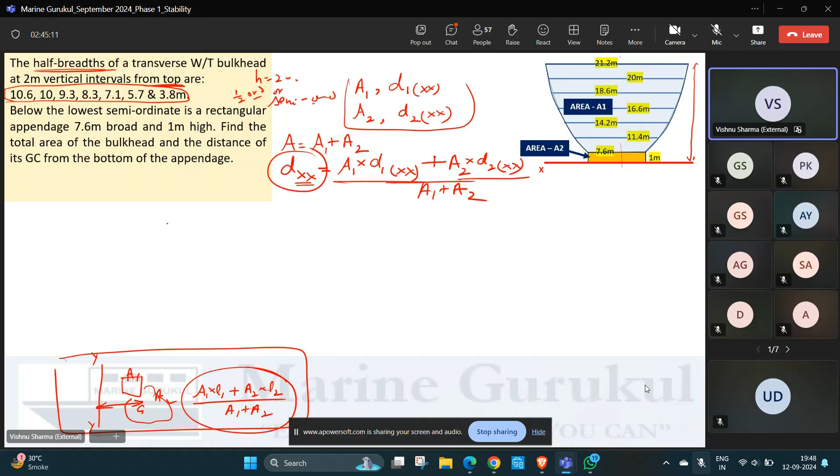Again, let me just say, if this is the ship and it has only two weights and the ship's hull weight is negligible, there is a W1 here whose KG is KG1 and W2 here whose KG is KG2. How do you find the KG of the ship? You take the vertical moment of W1, that is W1 into KG1, plus W2 into KG2, upon W1 plus W2. I'm sure all of you are comfortable with this, if there are only two weights on the ship, right? Yes, sir.

So what has happened? Instead of W1, you have area 1. Instead of KG1, the lever of W1, you have the lever of area 1. You have A2, you have D2, and instead of W1 plus W2, you have A1 plus A2. Can you now see the similarity, guys? Yes or no?

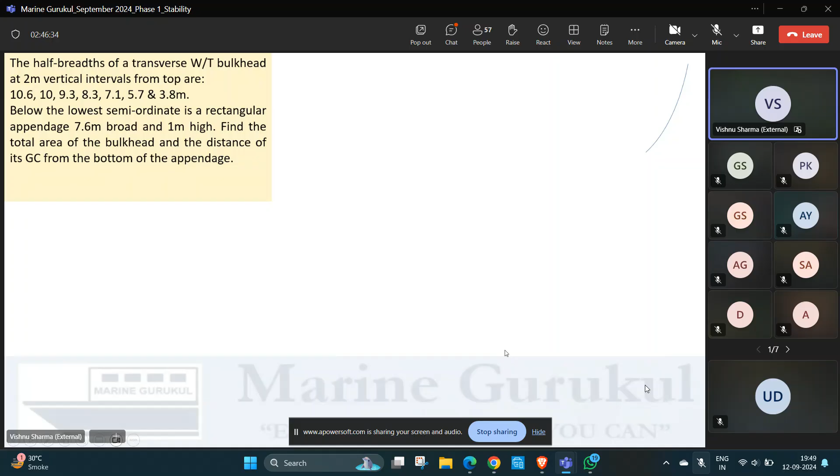I can always take one more extra class. It's okay. Now you see XX. Now area H is 2 meters. Let's calculate area 1 by rule 1. Guys, tell me, which ordinate would you like to write first based on my last question input?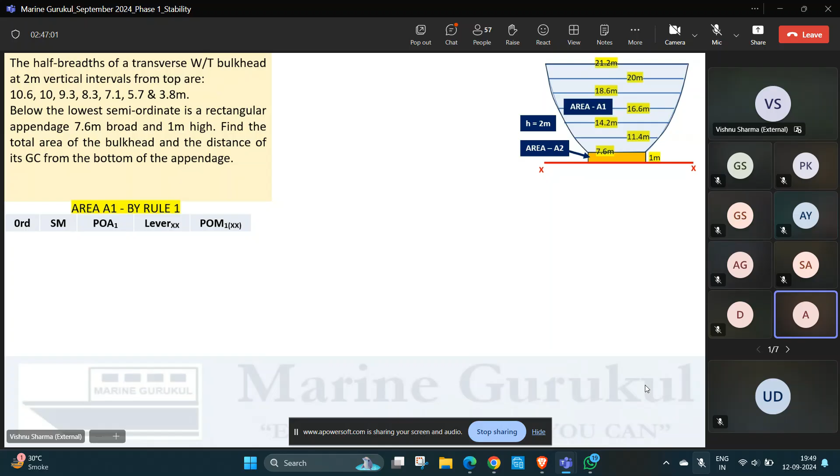7.6, sir. 7.6. Very good. The one closest to the ordinate, if we start writing levers, will be easier. Very good.

Please, in your register, make the column, put the Simpson's multipliers by yourself, then I'll show you and you can match it. You don't have to speak it out. Put the Simpson's multipliers for rule 1 against all the 7 ordinates.

Done? Yes, sir. Yes, sir. Done. Is it so? 1, 4, 2, 4, 2, 4, 1. Right, guys? Right, sir. Now we'll come to the lever part.

Look at the diagram. Did I say in the last class that every time we must take a multiple of h? Did I say so? Yes, sir. No, sir. Did I say so that you should always take multiple of h? No, sir. No, sir. I said whether I take multiple of h or I do not take multiple of h, it has to be driven by my convenience and comfort, right? Yes or no? Right.

So guys, look at this diagram and tell me. Levers will come from the diagram. What do you think is the lever for the 7.6 meter ordinate from XX? 1H, sir. H by 2, sir. 0.5H. Plus... 0.5H. See, sir, when it is becoming so complicated, somebody saying 1H, somebody saying 0.5H, somebody saying something else.

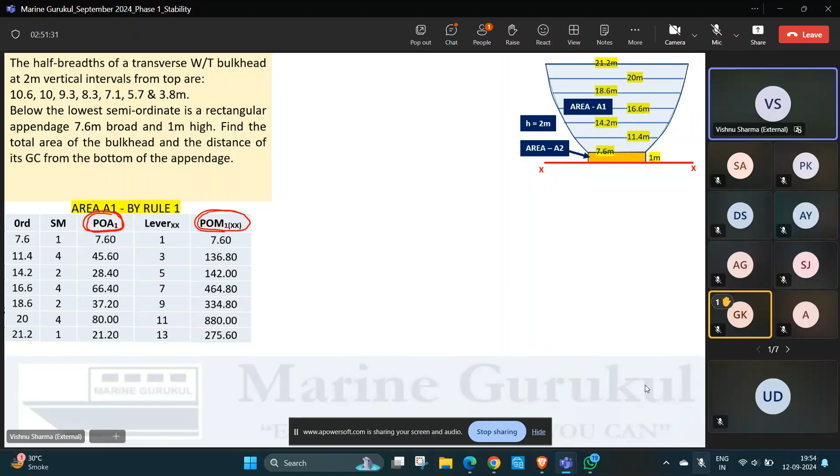So if you name your column headers clearly, you will not make mistakes. This will be POA1 here, and this will be POM1 here, and this is not... sorry, my mistake. This is XX.

Is the table clear? Please review it, especially Gurmeet, Danny, and others. Let me know if there is any concern. I can go back and explain.

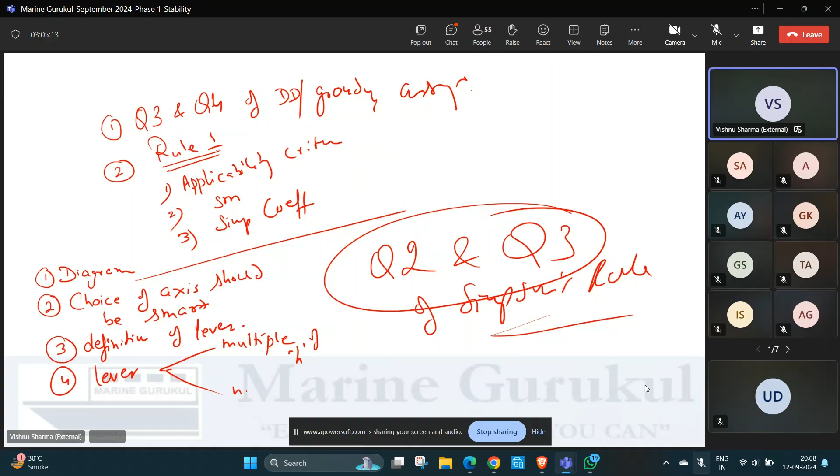Fourth, lever: multiple of h, not multiple of h, driven only by convenience. There is no hard and fast rule how the lever should be taken. You can take absolute numbers or multiples of h. Whatever in a given scenario makes my job easier, I will take that as a lever. So there is no hard and fast rule. I hope I haven't given you the impression that lever should always be taken as multiple of h, or that it should never be taken as multiple of h. It's your choice, whatever gives you comfort.

Clear, guys? Yes, sir. Okay, yes, sir.

So please revise this, you can revise these questions, they are with you. Let me hear tomorrow again. The first 10 minutes I'm ready to revisit any of these concepts, but of course there'll be some counter questions to you. I'll be happy to answer any questions, and then tomorrow we'll pick up speed. Tomorrow I have a target of at least about 10 questions to be done from the exercise, which will take us to the 12th, 13th question.

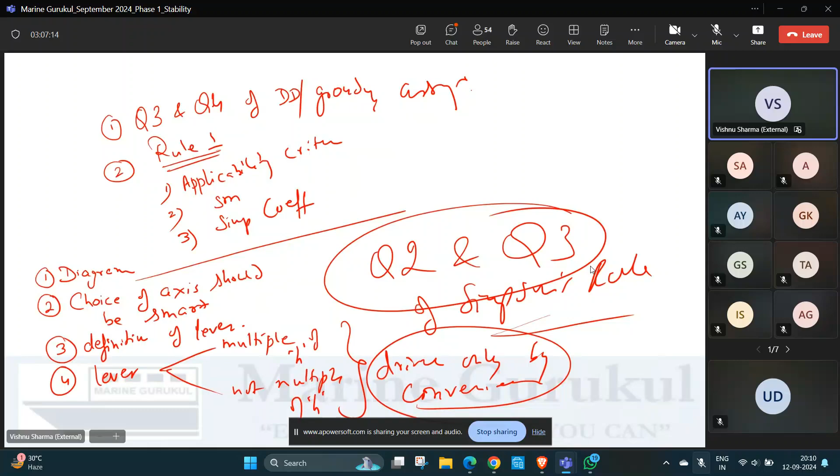Sir, okay, tell me, beta. Sir, can you please show the previous working, last step, sir? Let me see if it is there, beta. I don't know if it is there or not. No, I don't think - I think I have deleted it, beta. Let me see. Okay, sir.

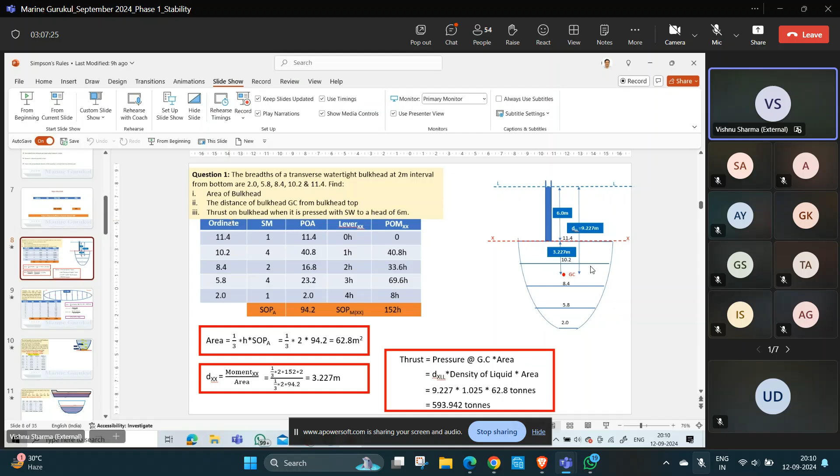I doubt it, but you can see this one. No, this will give you enough idea. You can take the steps of the first question, they will give you the direction. I'll write the further part as well. Don't worry, this is done. Is it okay? Yes, sir. It is done, sir. Yes, sir.

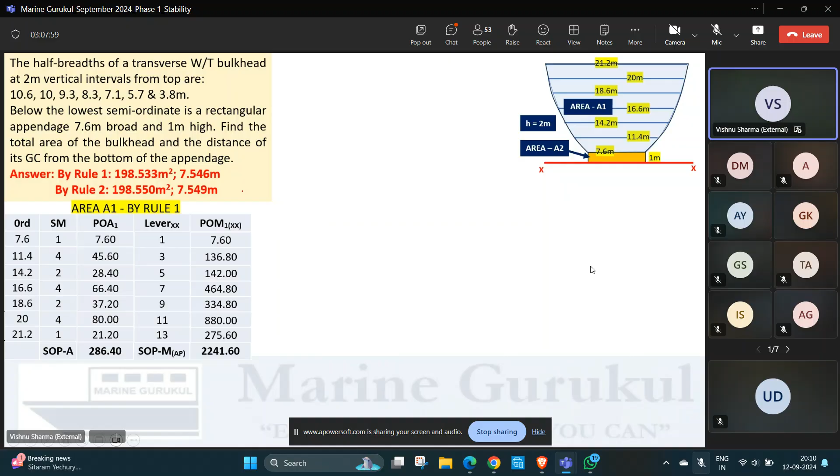You will calculate A1. A1 will be equal to 1 by 3 into 2. Those who want to sign out, can sign out. If you don't want to be part of it, it's okay - perfectly okay, guys, I am not doing anything else.

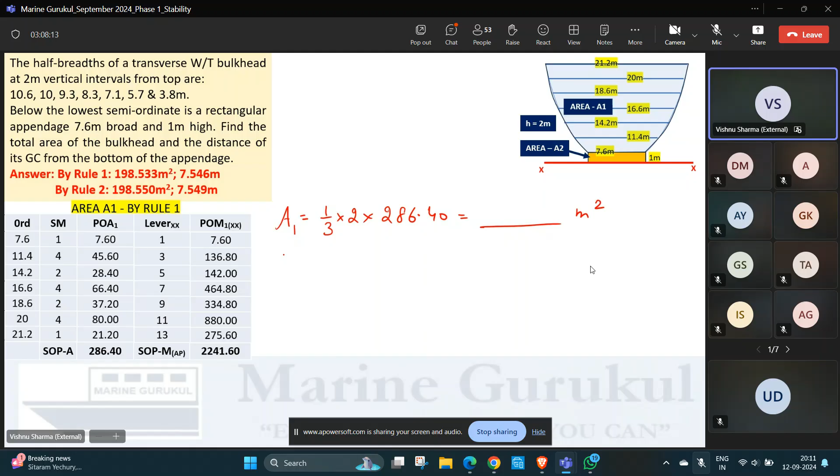D1XX, beta moment of area 1 about XX upon area 1, this will be equal to 1 by 3 into common interval 2 into sum of moments, 2241.60 upon area - 1 by 3 into 2 into 286.40. 1 by 3 and this will get cancelled, you will get some value here in meters - 7.82. Then that you can calculate.

That's okay. Area 2 - in our diagram it's a rectangle, so that will be 7.6 into 1, equals 7.6 square meters. D2XX, from our diagram, will be 0.5 meters. That doesn't need any explanation.

Total area equals A1 plus A2, answer is 198.533 square meters by rule. DXX, the distance of the geometric center of the total area from the bottom, is A1 into D1XX plus A2 into D2XX upon A1 plus A2, and this is equal to - you will get an answer of 7.546 meters. That's what you wanted, right, beta? Yes, sir. Yes, can take this. Clear? Yes, sir, clear. Thank you.